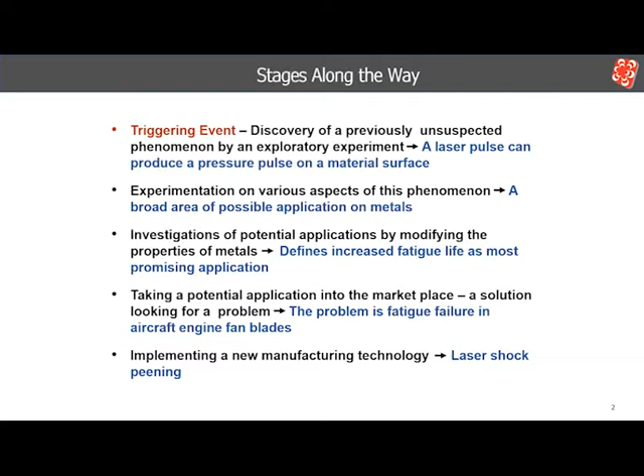We begin in the early 1960s. The triggering event occurred when two Russian scientists, Askaryan and Moroz, set out to measure the photon pressure of a pulsed laser beam on a target. What they measured was a pressure 10 to the 4th to 10 to the 5th higher than the estimated photon pressure. They suggested that what they actually measured was probably the recoil pressure from the material vaporized from the target surface by the laser beam.

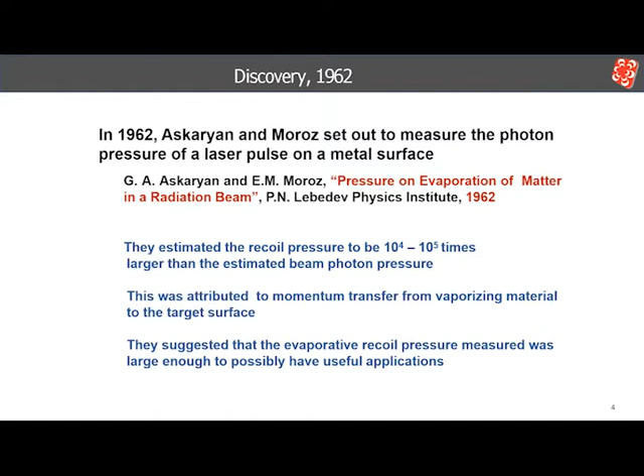They also suggested that this might have useful applications. This discovery prompted many other laboratories to investigate the material dependence, magnitude, and other characteristics of the vapor impulse associated with the laser pulse. It is interesting that many of these studies were carried out at government laboratories. The U.S. laboratories had quick access to the Russian technical journals, which were immediately translated by government-funded teams.

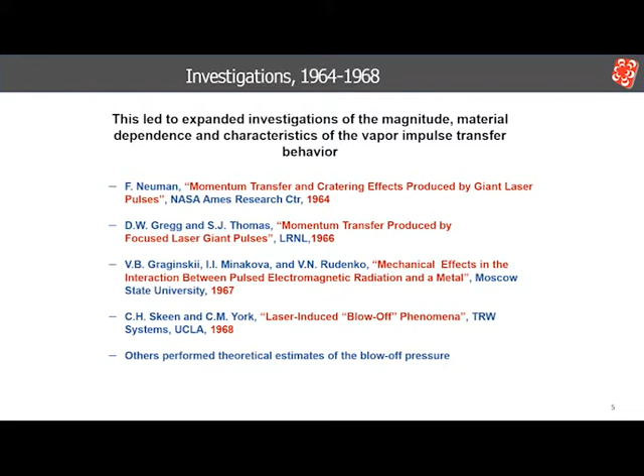The second key event occurred in 1968. Anderholm at Sandia Laboratories was also investigating some aspects of this vapor impulse, and like all the others, the target was in a vacuum because of the high laser pulse intensities used to increase the pressures and to simplify the measurement of the impulse. Anderholm made the connection that if the vapor was confined against the surface instead of blowing off, it would greatly enhance the shock wave pressure.

He vapor deposited an aluminum film on the surface of a 6 mm thick quartz disc and measured the pressure pulse with a quartz gauge. His demonstration of this concept produced a 3.4 gigapascal surface pressure with a beam power density of 1.9 gigawatts per centimeter squared. This simple demonstration for dramatically increasing the impact of a laser impulse on a surface would eventually enable the development of laser shock peening.

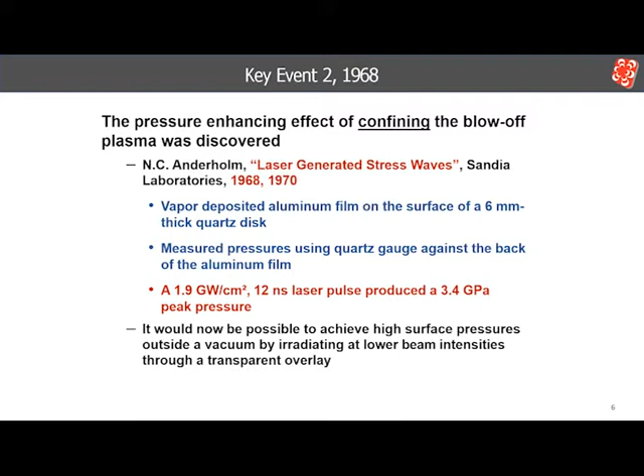In the same year Anderholm announced his discovery, Philip Malozzi convinced Battelle it should position itself to compete for programs developing laser fusion, a hot topic at the time. This would require a large laser, and Battelle acquired a laser from France.

The laser was a CGE VD640 neodymium glass laser configured to output up to 200 joules, with a pulse width of 20 to 30 nanoseconds or longer, and a Gaussian beam every 8 minutes. On the left is the control station, followed by the bank of capacitors for the flash lamps. On the right is the row of amplifier rods with the output at the far end.

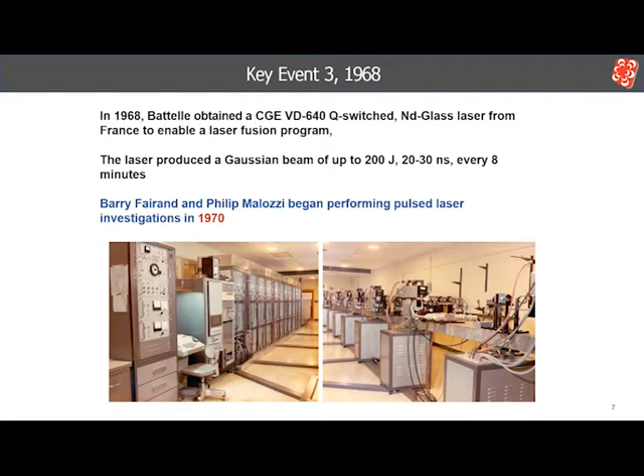For conducting the laser shock experiments, a small workstation was installed in line with the laser beam at the far end. With quartz overlays, the specimens were placed in line with the beam. With water overlays, in the first years, the specimens were submerged under a water layer and the beam was directed downward onto the specimen.

Next, I'll discuss events in the 1970s when much of the exploratory investigation of laser processing was conducted.

When it was realized that a significant shock wave could be produced in a metal surface by a laser pulse in air, it immediately generated interest in the effects it had on the target. These are the first investigations of the effect of a laser pulse-induced shock wave on the microstructure of a metal target. Mirkin shocked the steel target and observed deformation twinning in the ferrite grains extending more than half a millimeter deep below the shocked area.

This observation was followed by that of Metz and Schmidt, who laser shocked nickel and vanadium foils and then annealed them. After annealing, they used transmission electron microscopy to look at the microstructure in the foils. They observed small dislocation loops only in the shocked area. These could only have developed during annealing by the coalescence of vacancies produced by the plastic strain driven by the shock wave.

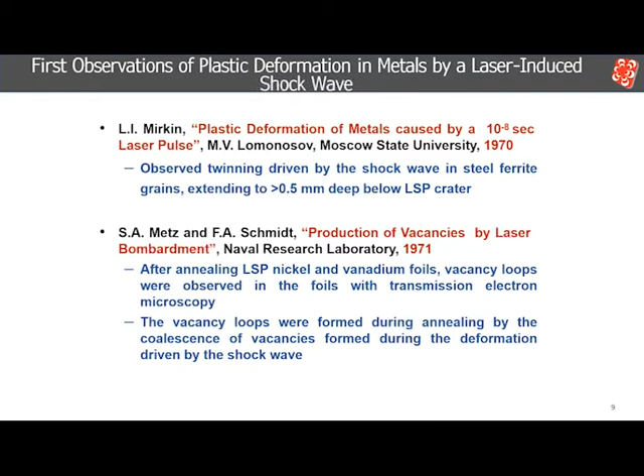The fourth key event occurred in 1972. After the Battelle laser became operational in 1970, in 1972, Battelle was still waiting for funding for the fusion program, and the laser physicists having the responsibility for the laser were looking for other uses for it until funding appeared.

In mid-1972, Barry Fairand approached Ben Wilcox in the Metal Science Group of Battelle as to whether there might be some tangible benefit to using laser-induced shock waves on metals. Wilcox suggested a simple experiment of laser shocking several thin aluminum alloy tensile specimens having different strength properties due to different heat treatments, and determining whether there was a resulting change in strength and ductility.

This experiment resulted in the first publication of laser peening.

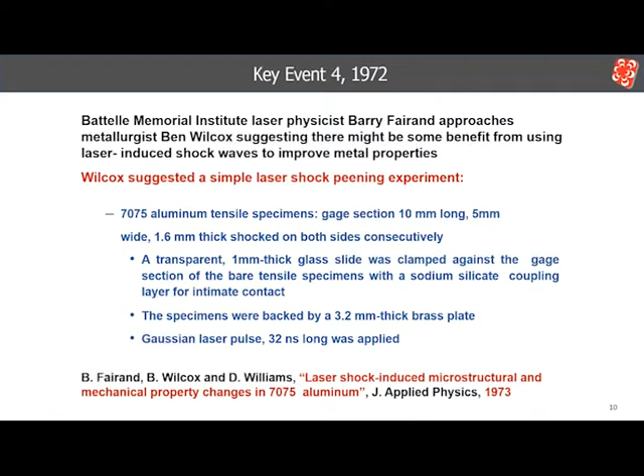The tensile specimens were 7075 aluminum, 1.6 millimeters thick. They were shocked with one shot on each side with a 32 nanosecond pulse through a glass overlay and backed by a 3.2 millimeter thick brass plate. The specimens were given several different heat treatments.

The solution treated and quenched condition has the lowest strength because there is no precipitation hardening. After laser shocking, there is some work hardening and loss of ductility. The stronger overage condition showed a significant increase in the yield and ultimate strength with a small loss of ductility. The increase in strength occurs because the precipitates generate a significant increase in the dislocation density when laser shocked.

The strongest peak aged condition has a very fine dispersion of small precipitates between a coarser dispersion of large precipitates. This imparts a big increase in precipitate strengthening, which is higher than the strain hardening effect. Thus, the shock wave actually causes a slight loss in strength because the dislocations driven by the shock wave had cut paths through the small precipitates.

This small experiment showed that a laser shock wave could significantly change the mechanical properties of a metal. Based on this result, Wilcox and Fairand submitted a proposal to the National Science Foundation to pursue exploring the effects of laser-induced shock waves on metals.

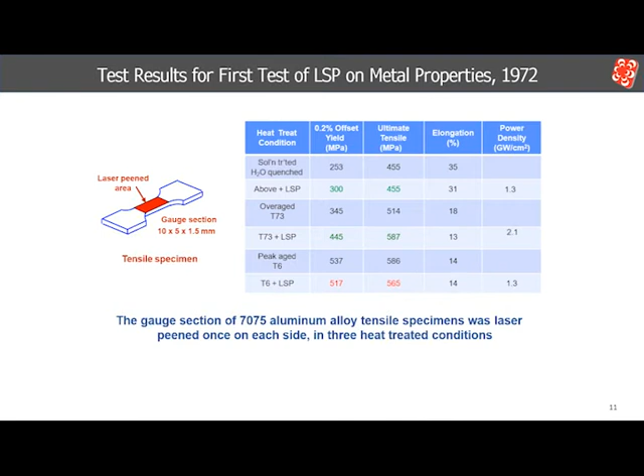Thus, fewer dislocations are formed, and the strength is actually decreased by the shock wave because it leaves behind some mobile dislocations and glide paths for movement during the subsequent tensile test.

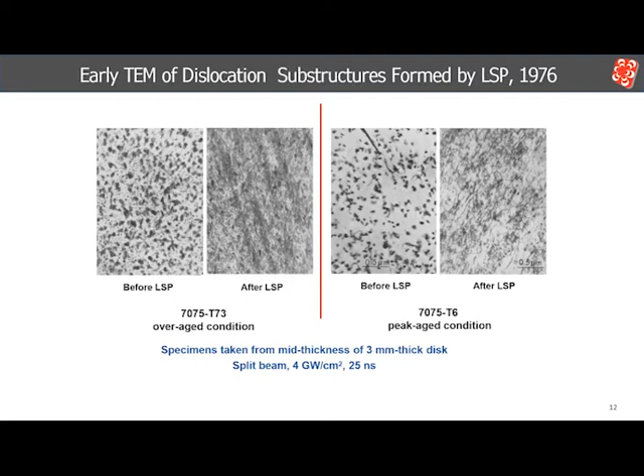In 1974, the first patent for laser shock processing was granted to Mallozzi and Fairand. Note the broad range of pulse length and energy density covered at this time when so little was known about the process. The different characteristics of potential overlays and types of overlays is well covered. Note at that time they were also considering the possibility of using an explosive coating to increase the pressure.

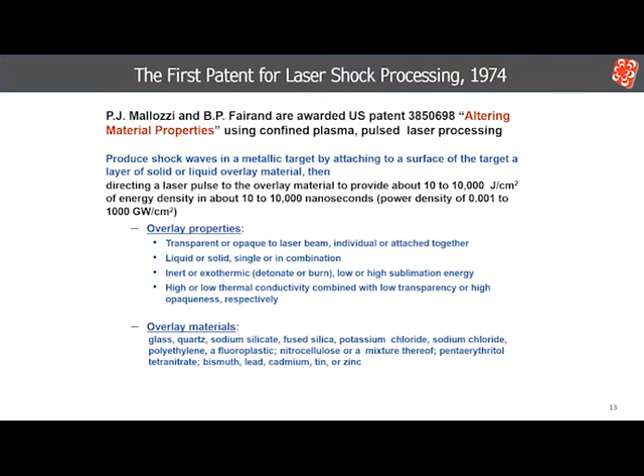In the same time period of the early 70s, others were investigating the effects of laser-induced shock waves. O'Keefe and Skeen were testing how to increase the shockwave pressure with different transparent overlays and looking at shockwave interactions with thin, unsupported metal targets, among other things.

Fox brought his specimens to Battelle for processing. He came up with the idea to use water and black paint, which turned out to be a very useful combination.

Yang measured the pressures developed on a broad range of thin metal coatings deposited on glass overlays at low power densities, and found little difference in the pressure between the different metals or film thicknesses.

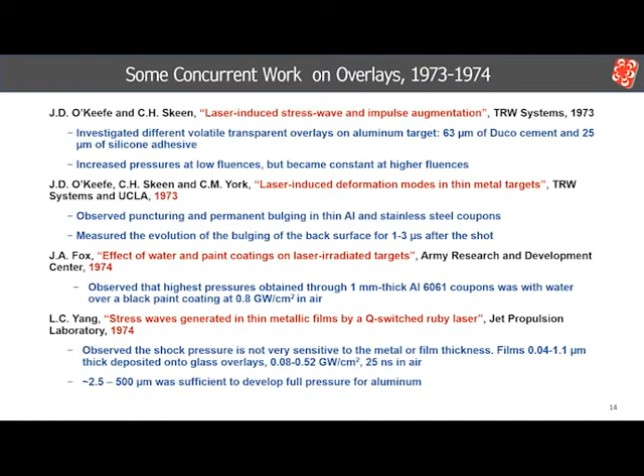In January of 1973, I returned to Battelle after spending a year at the Danish Atomic Energy Laboratory in Risø. At that same time, the National Science Foundation approved the funding for the laser shocking proposal. I was asked to take on the project jointly with Barry Fairand, and it turned out that he and I worked very well together. This program began six years of support by Robert Reynick, our National Science Foundation program manager.

The materials effort began with a look at the distribution and intensity of the plastic strain produced by a laser shock wave. Iron 3 silicon alloy was an ideal material to do this, providing direct visual evidence of plastic strain.

The physics effort began with an investigation of the pressure dependence on power density using various overlays and of the decay of the shock wave. In addition, computation of the shock waves was begun.

Most of the modeling used a 1D radiation hydrodynamic code named LILA. It was originally developed by Sandia National Laboratory in 1966 and was updated by Sandia and the Air Force in 1976. Later, laser shock strengthening of weld zones in aluminum alloys and split beam shocking were explored.

Near the end of the program, a 2D wave propagation code named TØØDY was used to determine whether the plastic strain distribution after laser shocking could be predicted.

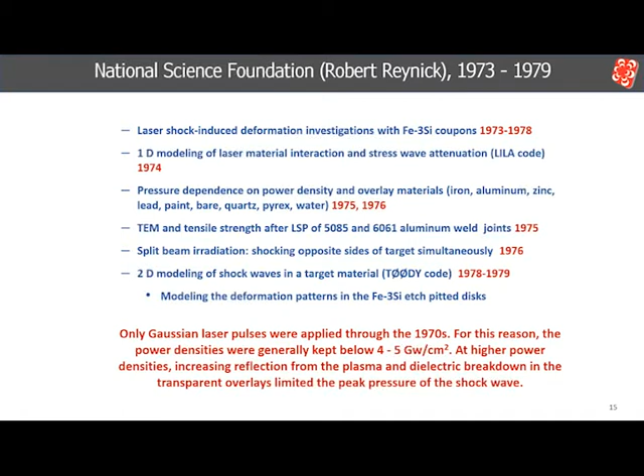Here we are going to look at the deformation patterns produced by laser shocking iron silicon discs. The plastic strain distribution can be seen by applying an etch pitting technique to the surface of the laser shocked cross sections of the alloy.

The top figure is a disc shocked with the lead plus quartz overlay. The lead overlay was initially selected and used in these initial experiments because of its low vaporization energy, enabling more of the beam's energy to expand the vapor and increase the pressure. Lead worked very well for power densities between 0.5 and 1 gigawatt per centimeter squared, but its effect diminished at higher power densities. After this study, it was no longer used.

Here the laser spot covered the entire surface of the discs. The deformation pattern in the upper figure shows there was significant interaction between the waves reflecting from the flat surfaces and those reflected from the circumference of the disc.

The lower figure was shocked with only a quartz overlay. The etch pit distribution is similar, but much lighter than with the lead overlay. Even though the power density is almost twice that of the top figure, it is obvious that the peak pressure was lower than with the lead overlay in the above figure.

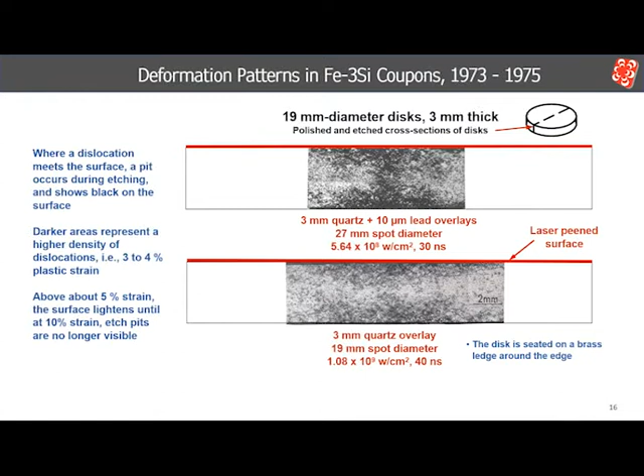Here a series of discs with decreasing thickness were all shocked with nominally the same conditions using a quartz overlay. They were shocked with a 2.5 centimeter diameter spot covering the entire surface of the discs. Although they were shocked from one side only, the back free surface shows about the same amount of strain as the front surface. There's a quartz gauge at the back surface of the two thicker discs, but not on the two thinner discs. The thinnest disc shows about 2 to 3% strain through the thickness.

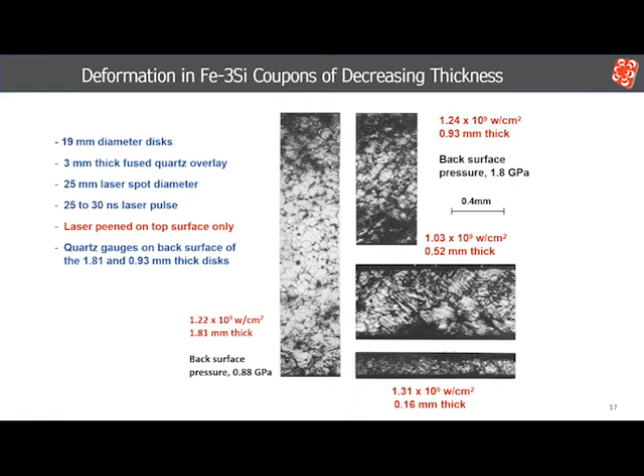These are the first measurements of the decay of a laser-induced shock wave. The measurements were made on the discs of decreasing thickness shown on the previous slide. The back surface pressure measurement was made on an iron film deposited on a quartz disc.

LILA was used for the decay computation. It's a hydrodynamic code and shows good agreement near the surface where most of the decay is hydrodynamic. However, deeper into the disc, where plastic work predominates, adding to the rate of decay, the measured pressure decreases more rapidly.

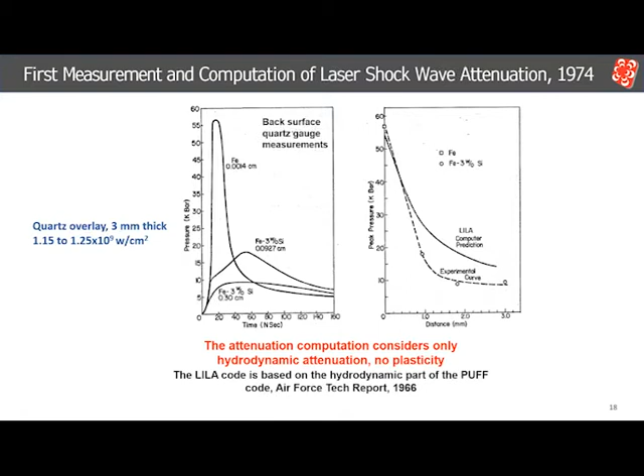In the left figure, we are comparing the laser pulse and the resulting pressure pulse for a water overlay on an aluminum film. The rise times are identical. The pressure pulse is about a factor of 2 longer than the laser pulse here, a little shorter than is usually observed, possibly because the power density is relatively low.

The spike on the back side of the pressure pulse was perhaps the thermal front entering the quartz gauge. On the right, we see the results of using the LILA code to compute this pressure profile from a triangular pulse simulating the actual one shown in the left figure.

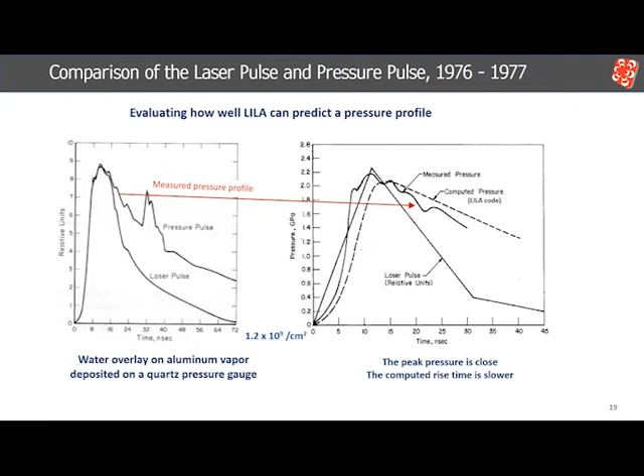The time scale on the right is about twice that on the left, so the actual pressure pulse on the right appears broader, but is recognizable by the ripples in the profile. The computed peak pressure is reasonably close, and the curvature at the bottom of the leading edge is also shown, but the rise time is slower.

To compare the overlays being considered at the time, computations were made to gain a better understanding of how they affected the magnitude and duration of the pressure pulse.

The figure on the left compares a computed profile for a zinc overlay with the measured profile. The rise time and peak pressure are in good agreement. However, the back of the measured pressure pulse decreases more rapidly than the computed one.

In the figure on the right, the computed pressure profiles of iron and lead overlays were modeled with a lower power density. We saw earlier that lead outperformed iron in the etch pitting experiments at a low power density.

For an input triangular pulse, like that shown in the previous slide, the two metals show quite different pressure profiles. The rise in pressure on iron occurs much further into the laser pulse than it does on lead. This can be attributed to iron requiring much more of the laser pulse's energy at the front end to generate enough vapor to increase the pressure.

This results in a much shorter pressure pulse on iron than lead, even though the peak pressure is about the same. Unfortunately, these computations were expensive and time-consuming back then, or more of these comparisons would have been pursued.

Holes were punched in a card for every line of code. Then drawers full of punched cards were carried to and fed into the big IBM computer. Often these computations took hours and had to be deferred to weekends.

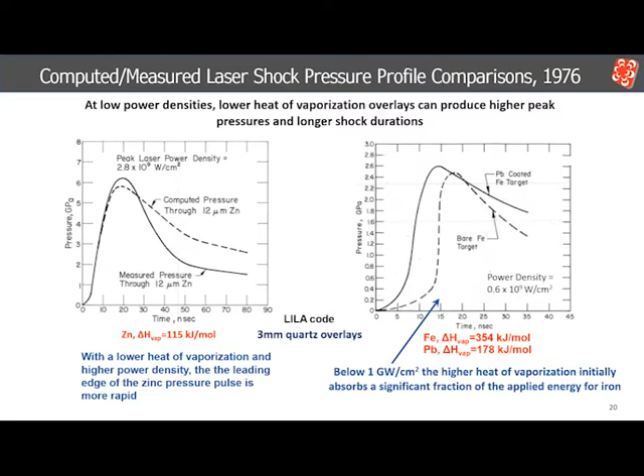We also took a look at comparing the effects of short laser pulses to much longer laser pulses. On the left, we show a comparison between measured short and long laser pulses and the resulting pressure pulses for a zinc and 3mm quartz overlay.

Because of the longer rise time in the long pulse, the pressure peak occurs much later than in the short pulse. The 185 nanosecond pulse maintains a sustained pressure of about half the peak pressure for over 400 nanoseconds.

On the right, we show short and long pressure pulses measured at the back surface of 3mm thick iron silicon discs with a quartz overlay. Here the pressure scale is in kilobars, so 10 kilobars is 1 GPa. The long pulse has sustained a much higher pressure out to at least 500 nanoseconds.

The cross-section of the iron 3 silicon disc shocked with a 200 nanosecond pulse shows 3 areas of shockwave interaction deformation. These were not seen after short pulses, except when the laser spot covered the entire top surface of the disc, enabling the circumferential reflected waves to immediately interact with the axial shock wave.

With the long pulse and a spot size less than half the diameter of the disc, the axial pressure was still sustained long enough that the interaction with the delayed circumferential waves, which also have a higher sustained pressure, was sufficient to cause plastic deformation.

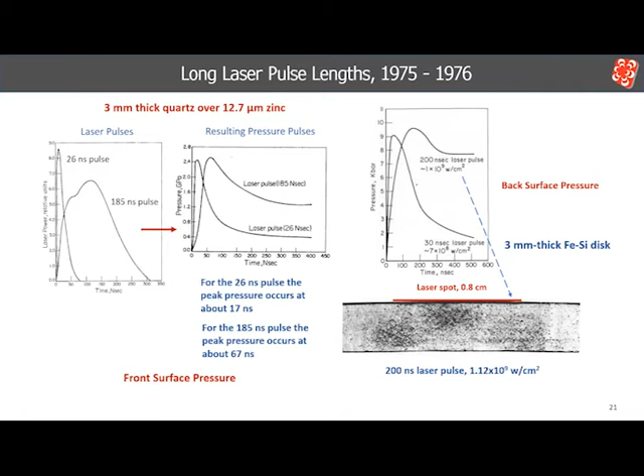In 1975, funding was received from NASA Langley to focus on the effect of laser shocking on 2024 and 7075 aluminum alloys. This included looking at effects on mechanical properties, corrosion, stress corrosion cracking, and black paint overlays.

Laser shock 2024 T351 showed increased pitting and corrosion resistance, but 7075 T651 showed little change. Both alloys displayed increased resistance to stress corrosion cracking after laser shocking, with 7075 T651 showing the greatest response.

There was also an evaluation of whether the TEA CO2 laser could produce strong shock waves. It could not.

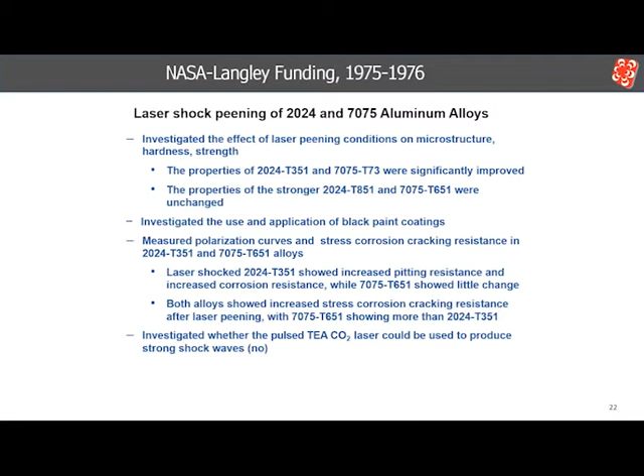One of the cases looked at in this program was the use of the split beam to get more uniform work hardening into flat tensile specimens. The meeting of the shock waves should increase the work hardening at mid-thickness. As expected, the work hardening was increased at mid-thickness, as shown here, and increased the average hardness through the thickness, but of course was less effective as the thickness increased.

In the thinner sheet, it is clear that the average hardness through the thickness was higher than through the thicker sheet, even with the lower power density applied.

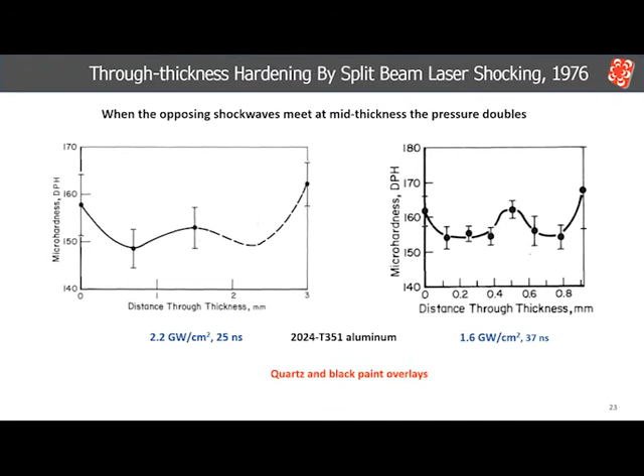In looking at work hardening of alloys by laser peening, most attention was given to 2024 aluminum. The surface hardness was measured with increasing power density to determine the pressure at which work hardening occurred. Black paint and quartz overlays were used for most of the shots. Two heat-treated conditions were investigated.

In the left figure, hardening of the 2024 T351 begins to occur at a very low peak pressure and steadily increases up to what appears to be a maximum at about 165 DPH, or diamond pyramid hardness.

For comparison, Herring and Olson performed flyer plate impacts on similarly aged 2024, whose hardness was very close to ours. Their flyer was a thin mylar plate producing a shock wave 150 nanoseconds long and square in shape. Their results are also plotted in the figure and slightly raise the apparent laser shock hardness plateau. For comparison, if you beat on the surface with a hammer, DPH 180 is the maximum hardness of these alloys.

In the right figure are the results for the stronger aged 2024 T851 heat treatment. The hardness scales of both figures are aligned here. This condition showed no work hardening from laser shocking up to a peak pressure of 5 GPa.

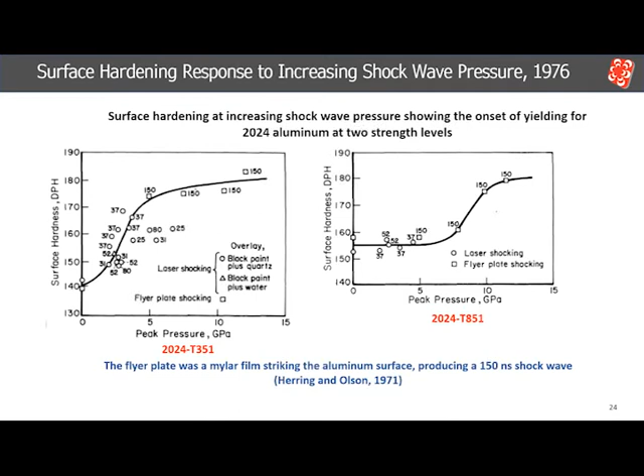Laser shocking was unable to overcome the resistance to deformation contributed by precipitation hardening from the thin, semi-coherent, lath-like S' precipitates below 7 GPa.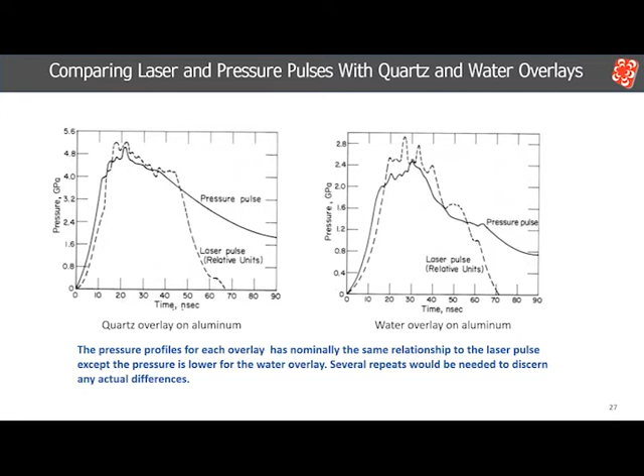If we compare the pressure profiles, the rate of pressure increase for aluminum lags significantly behind that for zinc. There are two contributing factors. First, the surface temperature is lower for aluminum, which can be attributed to the loss of heat or energy from the vapor through the aluminum surface.

Second, the delay in the pressure rise at the beginning of the pressure pulse for aluminum can be attributed to its higher heat of vaporization, consuming a significant amount of the beam energy early in the laser pulse. Because of these factors, zinc produces a higher and longer pressure pulse.

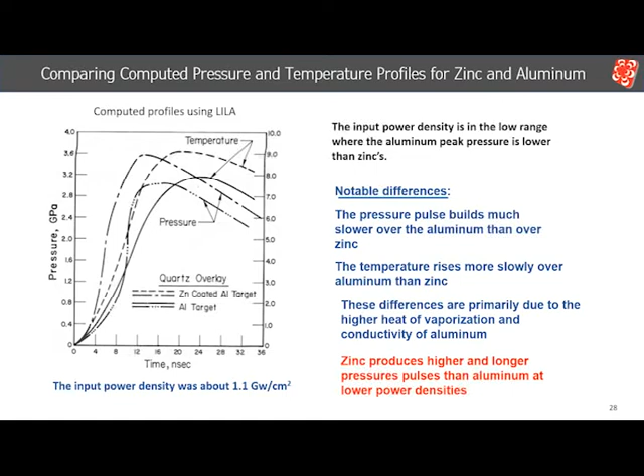In the same time period, we had a small program from the Army Research Office to determine whether pressure-induced phase changes could occur during laser shocking of some alloys. We chose the alpha phase to omega phase and the beta to omega phase transformations in titanium-vanadium alloys to investigate this possibility. These transitions were observed by others at static pressures above 9 gigapascals.

To have any chance of succeeding with a shock wave, we had to increase the shock pressure above 9 gigapascals, and looked at two ways to accomplish this. First, we computed what level of peak pressure we could expect from each approach.

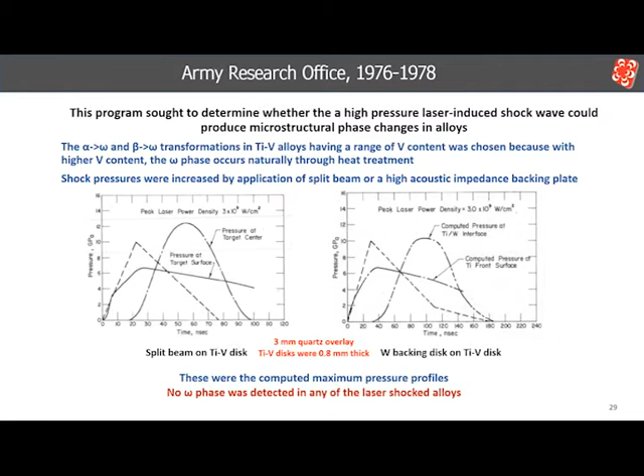However, although numerous variations were investigated experimentally, no evidence of the omega phase produced by laser shocking was found. One reason may have been that the pulses were too short to complete the transformation.

In 1977, when it was becoming evident that laser shocking could be potentially useful to industry, Battelle funded an effort to expand the exploration of applying laser shocking to other materials and properties. We first examined the effect of laser shocking on fretting fatigue and fatigue of welds, with long life increases for both. The effect of laser peening on galling and wear resistance in stainless steel showed positive results.

Ceramics were also investigated. Shocking silicon nitride gave interesting results with some increases in hardness and plasticity. We also had the idea to take advantage of the volume increasing tetragonal to monoclinic phase change in tension in yttria stabilized zirconia, to use the tensile shock wave reflecting from the back surface to drive transformation to the higher volume phase. This would then create a compressive residual stress in the back surface and add additional toughening to this ceramic.

It didn't work. Battelle also funded an extensive investigation of fatigue of 2024 T3 aluminum and the effects of variations such as the use of annular spots around holes, transparent acrylic overlays, use of momentum traps, split beam applications, and residual stress formation over a wide range of power density. We also looked at laser shocking steel in this program.

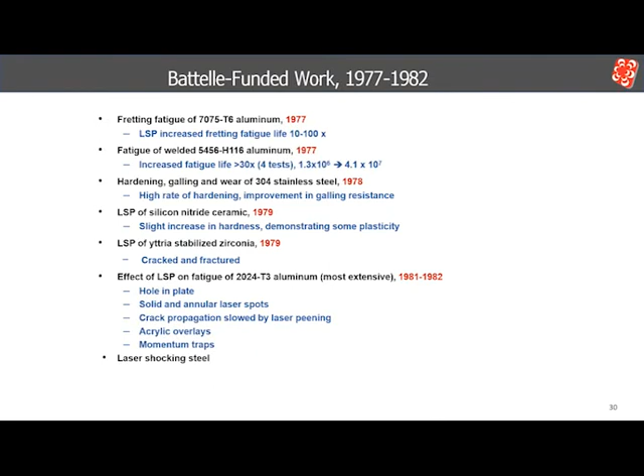In 1977, we were beginning to look at other mechanical properties beyond strength, hardening, and corrosion. Steve Ford suggested we examine how laser shocking might affect fretting fatigue in riveted joints in aircraft structures.

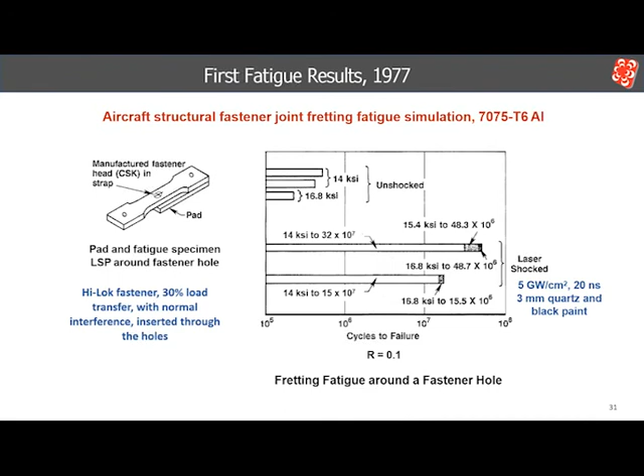The lower disc has a guard ring press-fitted onto it, intended to produce a much different stress wave interaction. With the guard ring, the tensile waves reflected from the outer rim of the disc cannot pass back through the interface into the central disc.

TOODY now predicts a column of more intense deformation along the axis, as well as deformation associated with the internal interface of the guard ring. However, the most intense strain along the axis is at the top of the disc, not the bottom. The strain distribution at the guard ring interface is pretty much as predicted.

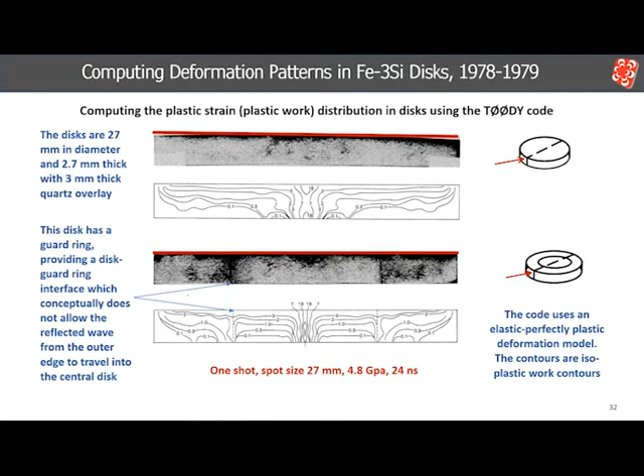After obtaining good fatigue results in fretting fatigue and aluminum alloy welds, we were funded by the Air Force to investigate laser peening around simulated fastener holes in 2024 and 7075 aluminum. The objective was to inhibit fatigue crack initiation and propagation from the holes themselves, not fretting damage. We were also to present preliminary design concepts and costs for a production laser in case of compelling results.

In this program, we obtained the first residual stress measurements on laser-shocked surfaces, confirming the compressive residual stresses produced by laser peening. The fatigue results showed some improvement due to laser peening, but not enough to pursue it further. Unfortunately, we were still applying lower power densities to avoid the dielectric breakdown and reflection problems encountered at higher power densities.

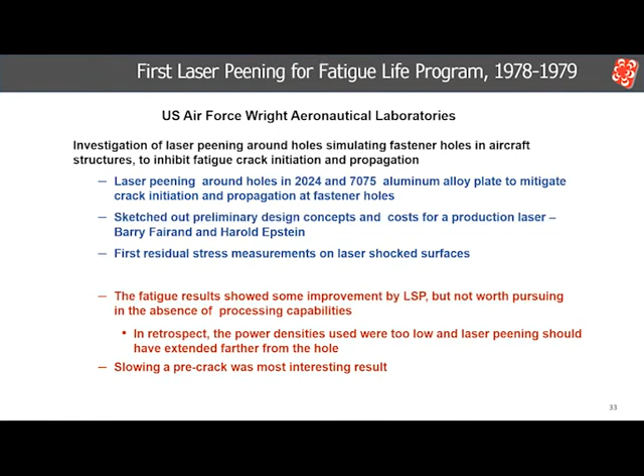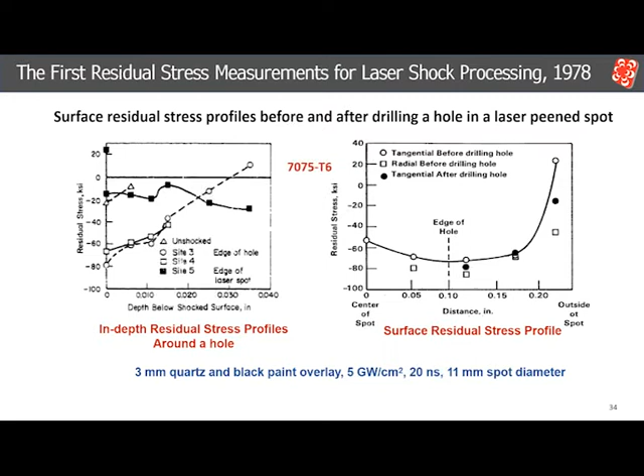Before testing, the crack lengths were nominally about 5.7 millimeters long, including the hole and notches. In the initial unshocked condition, the fatigue life was 1.2 to 1.4 times 10 to the 5th cycles. In the first laser peen set without pre-cracking, the fatigue life was nominally increased 6 times. In the second set, laser peening after pre-cracking, the fatigue life was increased about the same amount.

Although the test started with a crack present, the laser peening extended farther out in front of the crack, contributing to this increase in fatigue life.

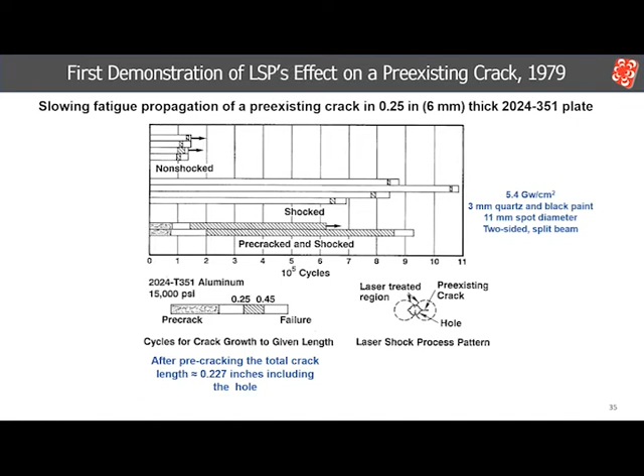We began looking at laser peening steel in 1980. First investigated was the hardness dependence of the residual compressive stress. In 1.5 millimeter thick steel sheet, the residual compressive stress produced in the hardest condition, Rockwell C54, was much higher than that produced in the softer condition, Rockwell C42.

The surface compressive stress in RC54 steel was about the same for 1 shot and 5 shots, but in depth 5 shots produced higher stress. Because of the thinness of the sheet, more shots could not increase the depth. The zero crossing was the same for both 1 and 5 shots.

It was about this time that we realized that if the front end of the Gaussian pulse was cut off to create a fast rise time in front of the laser pulse, we could reach higher peak pressures by increasing the power density. By sharpening the leading edge of the laser pulse, most of the beam energy would be quickly absorbed by the expanding vapor before the plasma progressed to reflecting too much of the beam and dielectric breakdown of the transparent overlays progressed too far. Subsequently, power densities above 5 gigawatts per centimeter squared are now routinely used.

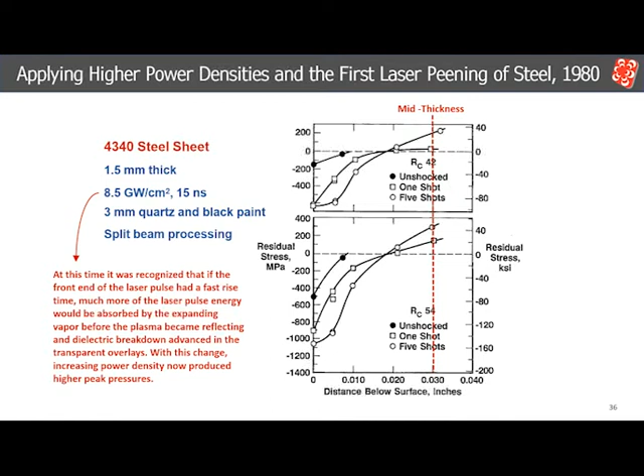The fatigue properties were examined in two configurations, steel sheet and steel bar. In laser peening thin sections, where fatigue cracks generally occur at an edge, the laser peening would be applied along the edge where a crack could occur.

This resembles laser peening a fillet, where the main effect is to retard crack initiation. As a crack moves into a laser peened surface on a thick section, the retardation effect decreases with depth as the compressive stress decreases. The steel was tested at a hardness of 54 Rockwell C.

Laser peening produced a tremendous 80% increase in fatigue strength.

Laser peening the surface of the notch in the bar using black paint and water overlays, the specimens were given 1, 3, or 5 shots. With 5 shots, the fatigue strength was increased at least 30%.

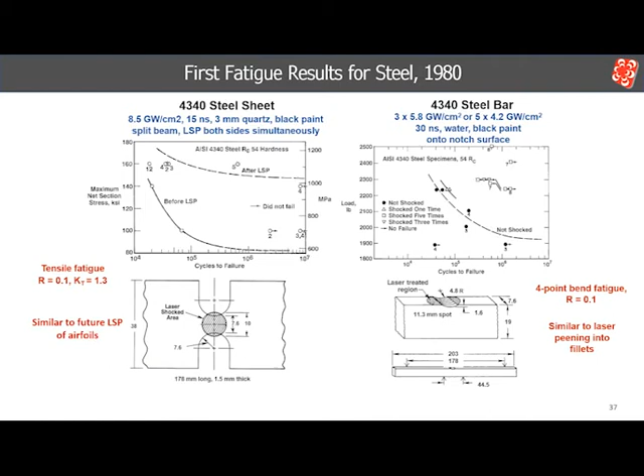When the laser peen surface surrounded the hole, a crack would form on the hole surface at mid-thickness, tunnel under the surface, and not appear on the surface until it was almost at the edge of the laser peen spot.

By laser peening an annular ring some distance from the edge of the hole, the crack was immediately visible, but it was slowed when it hit the compressive stress under the laser peened ring. This still provided a factor of 2 to 3 increase in the fatigue life.

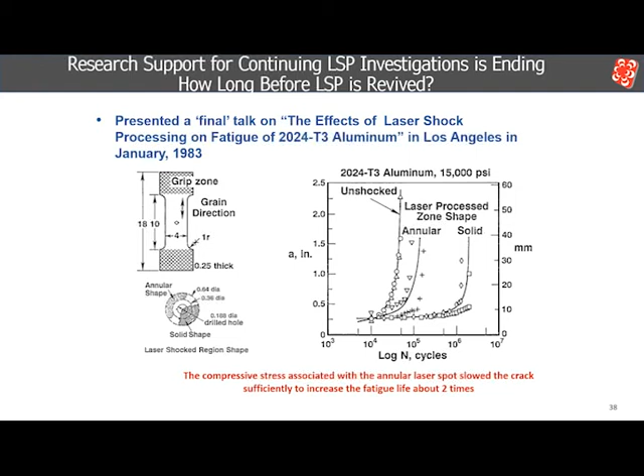By the early 1980s, it was getting more difficult to get funding for laser shock investigations. It was no longer a novelty, and the broad outline of the effect of laser shocking on metals had been sketched out. The research funding sources felt that it was no longer an appropriate use for basic research funding. It was time to identify potential users of the technology and sell them on funding the work necessary to have a technology they could use.

Key Event 5 was initiated within a week or two after the Los Angeles conference, when I received a call from the foundry manager of a cast iron foundry in Decatur, Illinois. He had attended the talk in Los Angeles. The foundry was Wagner Castings, making castings for the auto industry.

He visited Battelle, saying there had been recently a management buyout of the foundry from the Wagner family, and the management was now looking for ways to broaden their market. When he had reported on the Los Angeles meeting to management, he described laser shocking as something they should consider.

The idea was that if they could improve the fatigue properties of laser peened cast iron to match that of steel, they might be able to undercut the price of steel parts and capture a share of the market.

When I visited Wagner Castings the next week, they agreed to fund laser peening of cast iron test specimens and test them. If successful, they would negotiate a laser peening license from Battelle and support development of laser peening at Battelle for their use.

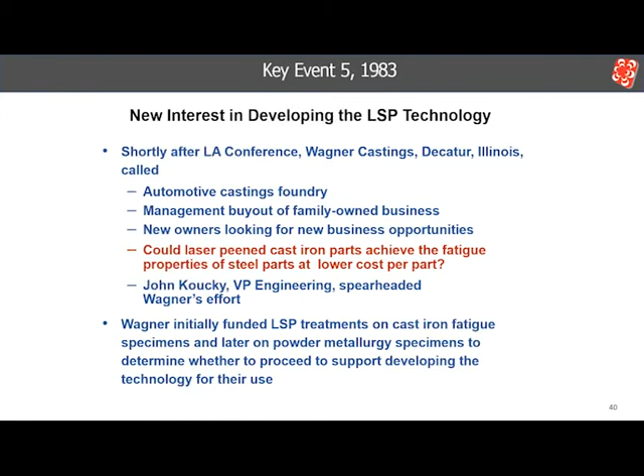After these tests, Wagner negotiated a licensing agreement with Battelle and commenced to fund the development of laser peening.

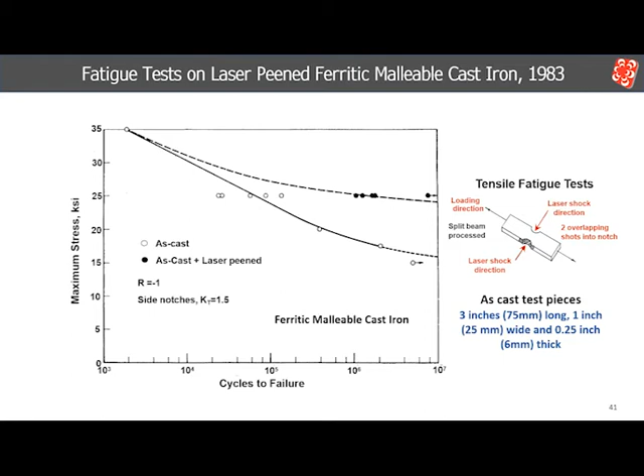Not long after this, Wagner thought another way to broaden their market would be to remake themselves into a near-net or net-shaped part provider by acquiring a company that produced powdered metal parts. They would then laser peen them and expand their market. To assess whether laser peening could significantly improve the fatigue strength of powdered metal parts, Wagner supplied notched powder metal tensile fatigue specimens identical to the cast iron specimens.

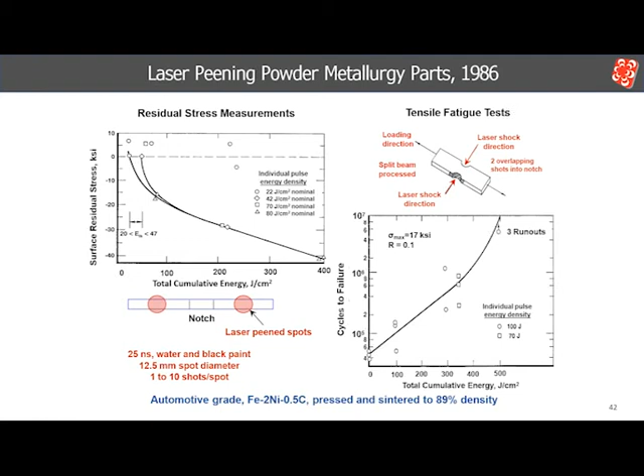In 1986, Dr. Remy Fabbro and Jean Fournier from the École Polytechnique in Paris visited Battelle to discuss laser shock processing. After returning to France, Dr. Fabbro's group initiated an era of extensive work on many important aspects of laser shock processing in France in the following decades. This work was of great benefit not only to our activities, but also to providing information and encouragement to other groups interested in pursuing the technology. All these combined efforts have contributed to the increasing acceptance and use of this technology over the last 30 years.

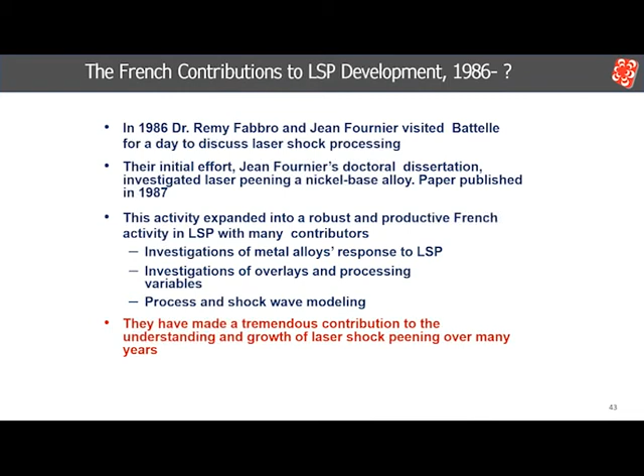For Wagner to demonstrate the commercial feasibility of laser peening, they would need a laser with a small footprint and a pulse rate much greater than 1 every 8 minutes. By 1986, Wagner made the decision to fund the design and construction of a small footprint laser providing 2 beams of 50 joules each, 20 nanoseconds, with a 1 Hz pulse rate. The laser was designed by Harold Epstein and built at Battelle.

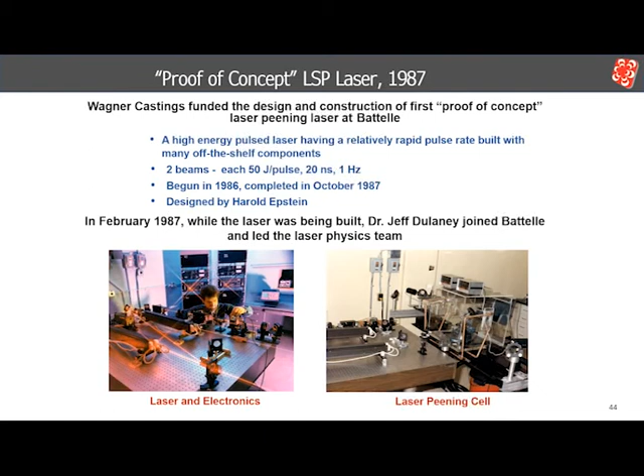The next step was to take the technology into the marketplace, a solution looking for a problem.

In the late 1980s, after building the prototype laser was underway, Wagner and Battelle began to market the technology. Wagner's plan was to provide laser peening services as well as using it in their foundry. Laser peening was largely unknown in the industry. John Koucky, Wagner's chief engineer and LSP program manager, assisted by me from Battelle, undertook to introduce industry to the new technology and develop interest.

From the many presentations and phone calls made to companies who could have a perceived need for laser peening, numerous test parts were given to us to laser peen and returned to the companies for testing. In most cases, there was significant improvement in fatigue life. However, we weren't equipped to immediately offer services. There was no laser peening facility. It was difficult to convince a company that great test results on their product justified a future commitment to install or send their products to a non-existent facility.

However, we were accumulating valuable laser processing experience and data that would be useful in that transition later. I was told that it was much easier to introduce a new alloy or material to industry than a new manufacturing process. A new process had to fit into an existing manufacturing system with minimal interruption of the flow of product. However, if there is a crisis with a product and a new technology was a solution to the problem, there was a huge incentive to get the new technology into the product, despite the cost and inconvenience of doing so.

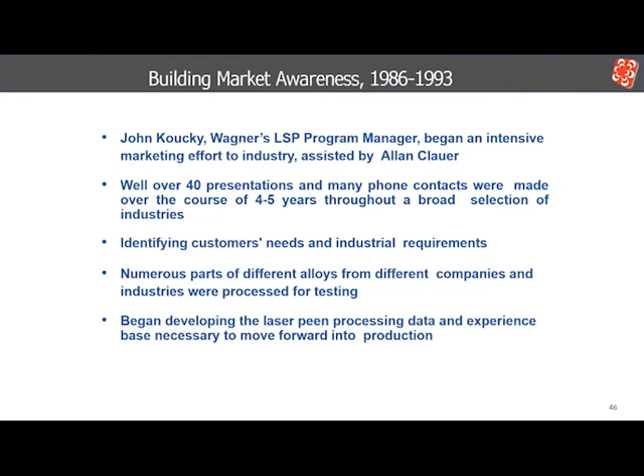The situation was about to change.

The sixth key event occurred at a presentation made by Koucky and myself to the Air Force at Wright-Patterson Air Force Base in Dayton, Ohio in 1990. After the presentation, William Cowey asked whether we had talked to General Electric aircraft engines in Cincinnati. We said we hadn't been able to set up a meeting. He took us to his office, got on the phone, and set up a meeting with them for us later in the week. At the meeting, after an abbreviated presentation on laser peening and much discussion, GEAE gave us their small standardized test piece to laser peen and returned for evaluation.

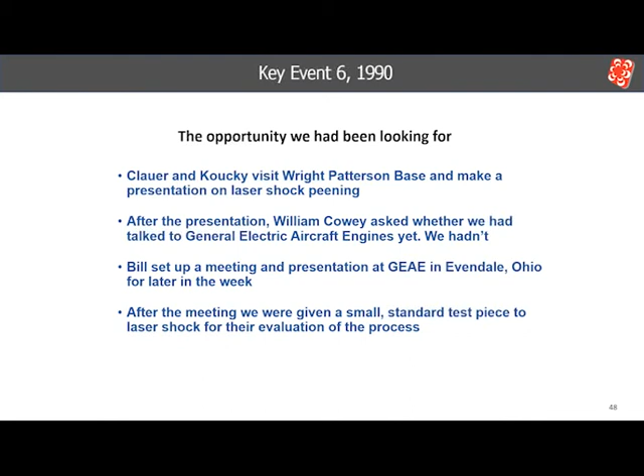The problem was that the F-101 engines on the B-1 bombers were susceptible to foreign object damage on the leading edge of the first stage fan blades. Damaged blades could fail in flight and destroy the engine. It was possible that the engines were sucking in fine particles from the runways on takeoffs and landings, since most of the damage were small nicks a few tenths of a millimeter deep. These small nicks could not be tolerated.

During inspections, they were detected by dragging a thread or thumbnail along the leading edge. If a nick was detected, the blade had to be replaced. Though small, they imposed a huge operational cost for damage detection and blade replacement, as well as grounding the planes waiting to be repaired.

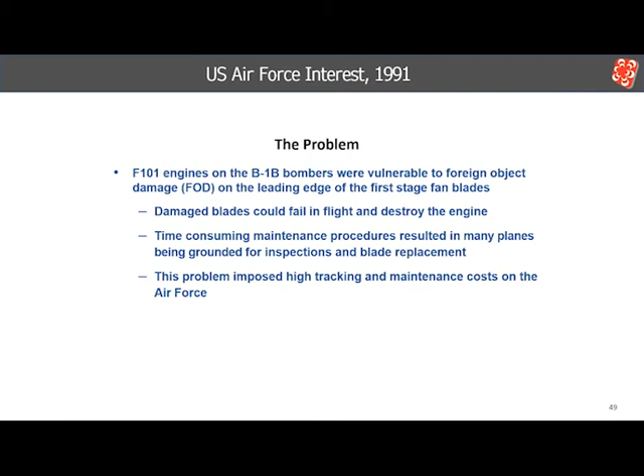After evaluating the laser peen test piece, GEAE sent 4 first-stage fan blades for laser peening. They were to be laser peened along the leading edge up from the platform. When the 4 laser peen blades were returned to GEAE for testing, they damaged them many times more severely than a nick. They used a hacksaw to make a 6 millimeter deep notch in the leading edge.

After testing them, the results were almost unbelievable. They tested like new blades. There was no need to pursue optimization of the processing parameters. With this result, further testing and planning for implementing the process on the blades began.

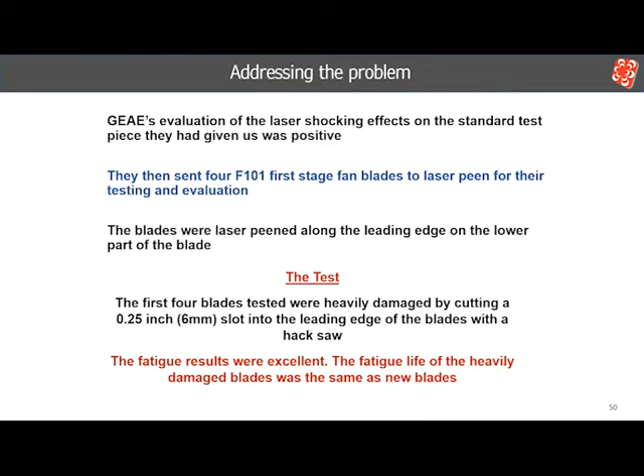Years later, the Air Force did their own evaluation of the process. These are their results. The Air Force compared damaged blades given different surface treatments and 2 different types of damage to a new blade. The surface treatment conditions were dual shot peening applied to new blades at that time, high intensity shot peening, and laser peening.

The 2 types of damage were a sharp chisel pushed 6 millimeters into the leading edge and a 3 millimeter deep cut by electrical discharge machining. The chisel damage had heavy plastic deformation at the notch tip, while the EDM notch had none, but instead had a thin re-solidified layer, probably containing small shrinkage cracks with some tensile residual stress.

The blades were tested on a siren testing device at a very high frequency after being held 24 hours at 400 degrees Fahrenheit. The testing began at a stress amplitude of 20 ksi, then stepping up the stress by 10 ksi increments at 1 million cycle intervals until failure.

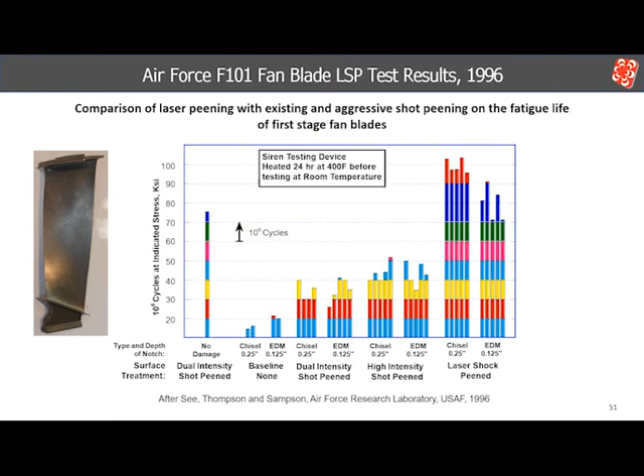The early 1990s were a time of transitions. In 1987, Wagner Castings decided to become part of a holding company, Sudbury Incorporated. Soon after that, Sudbury began to run into financial problems, leading to bankruptcy in 1993. At that point, Wagner was told by Sudbury to return the laser peening license to Battelle and cease supporting any further development. The impact extended farther than Battelle, however.

GEAE had an agreement with the Air Force to begin laser peening of in-service F-101 blades in 1997. Wagner was to build a laser peening facility and be prepared to process the blades at that time. With Wagner out of the picture, GE had to change plans.

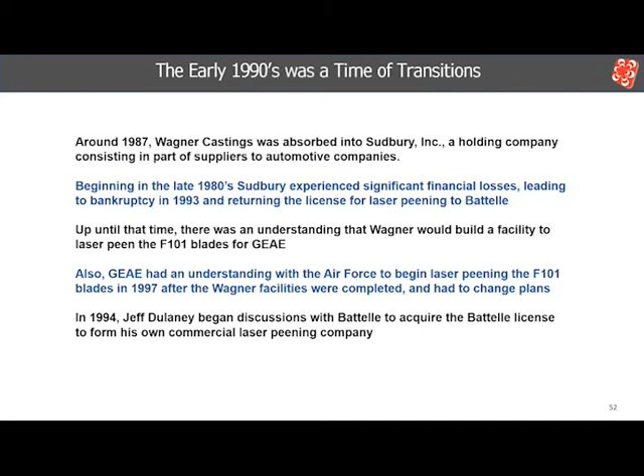In early 1994, Jeff Dulaney began negotiating with Battelle to acquire a license and start his own company. Jeff Dulaney founded LSP Technologies in February 1995, operating out of quarters in the basement of Battelle, and received a license for laser peening from Battelle in the summer of 1995.

At the same time, GEAE also negotiated a license with Battelle and asked Dulaney to help them evaluate the laser manufacturing company's capabilities to build production lasers in the short time available. They decided that none of them could. Failing to find a suitable commercially available laser, Dulaney offered to design and build the lasers for GEAE under their supervision in the summer of 1995. Todd Rockstroh led the GEAE team.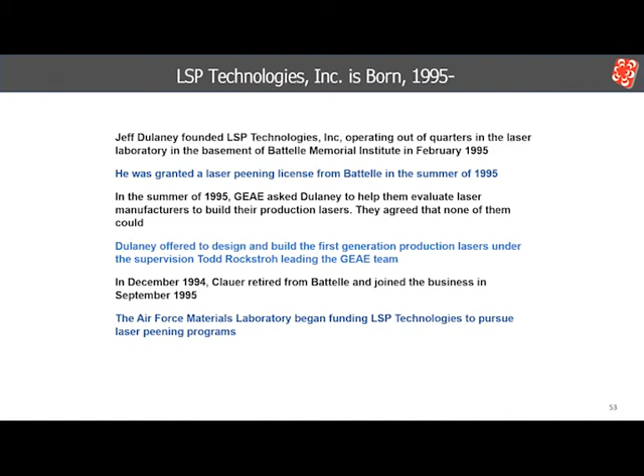I retired from Battelle in December of 1994 and joined LSP Technologies in September 1995. Chris Lykins of the Air Force Materials Laboratory provided significant funding to continue to pursue laser peening programs at LSP Technologies.

LSP Technologies delivered a small laser to GEAE in 1996 to begin low-volume production. When the first production laser was delivered in 1997, they went into full production. Two additional lasers were delivered later.

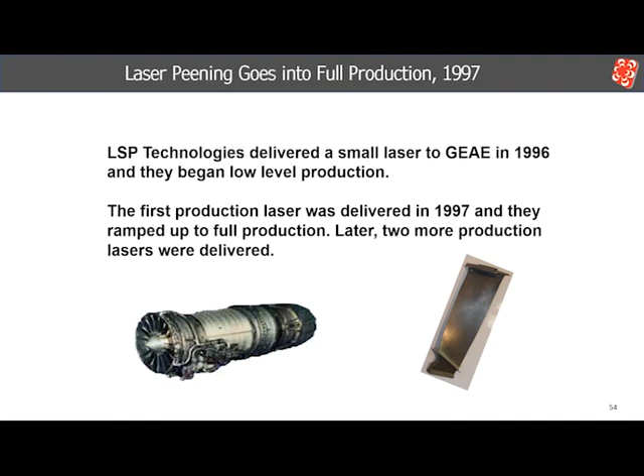Finally, 25 years after Wilcox and Fairand performed the first experiment of a laser-induced shock wave increasing the strength of 7075 aluminum, laser peening achieved the status of a commercial production process, providing a huge advance in the operational safety and maintenance cost of an aircraft.

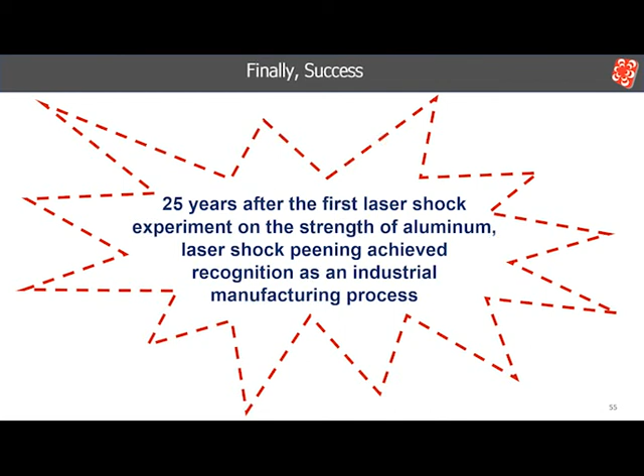With that benchmark achieved, Air Force support was now key to keep the technology growing and advancing to address lowering cost and increasing the number of users and applications. To ensure that the technology would be available to it and its suppliers industry-wide in the future, the Air Force recognized it needed to nurture the development of a strong business foundation for the technology. Then, at some point in the near future, industry itself would be driving growth and advances in the technology, and it would be there for the Air Force to use if needed.

To help achieve this goal, the Air Force Materials and Manufacturing Directorate funded the design and construction of a production prototype laser, a production laser, and work cells at LSP Technologies. These lasers were used extensively for production and development. In another step forward, they have now been replaced by lasers with advanced design and capabilities without outside funding.

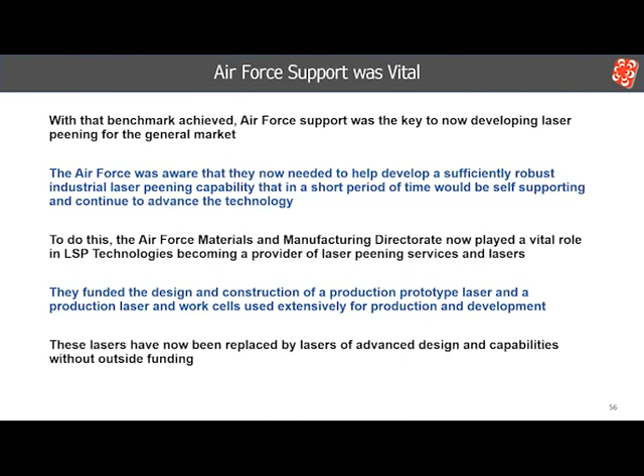With these Mantech-funded lasers, in 2003, LSP Technologies began production laser peening the blades of an integrally bladed rotor for the F-119 engine built by Pratt & Whitney. The F-119 engine powers the F-22 fighter aircraft.

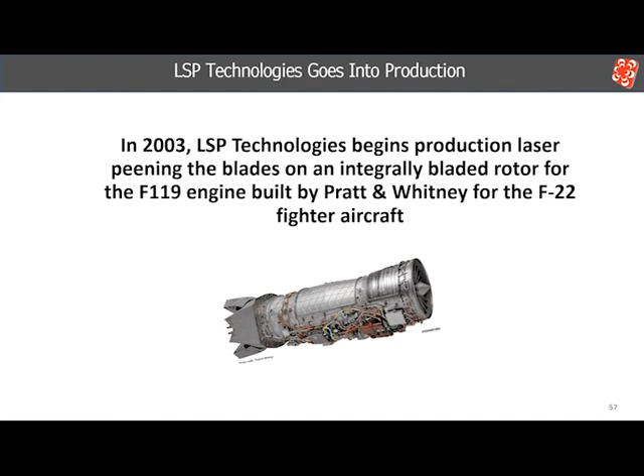In the late 1990s, Dr. Yuji Sano introduced the use of low-energy lasers for laser peening welds in nuclear reactor vessels. Applying laser pulses of about 100 to 200 millijoules onto spots less than 1 millimeter diameter at a high pulse rate, he attained compressive stress depths of up to 1 millimeter by applying thousands of spots per centimeter squared in multiple layers.

Features of the laser peening without coating, or LPWC process, are that it does not use an opaque overlay. It can be used underwater at a large standoff distance by halving the neodymium glass wavelength to 532 nanometers. It can be modified to deliver the beam through an optical fiber and is relatively portable.

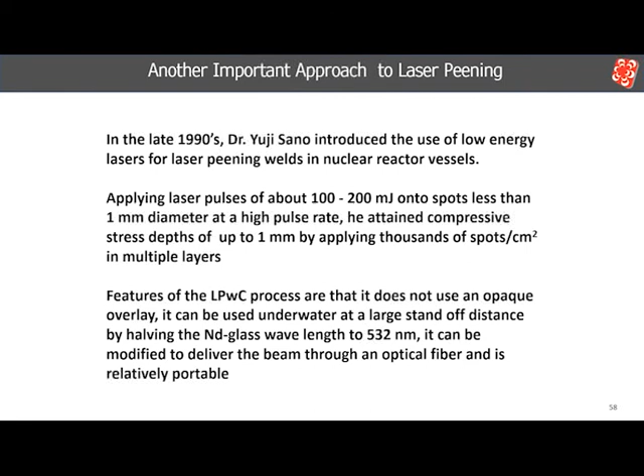The last 20 years have seen much increased activity in laser peening around the world. Shown here is a list of countries that either have or have had laser peening programs. They are listed in the order of the year of their first publication. There are 25 countries listed.

I may have a few wrong, but it demonstrates the widespread interest and the increase in the rate of laser peening knowledge now being generated worldwide. A total of over 1,000 technical papers have been published on laser shock processing. By far the most address laser peening.

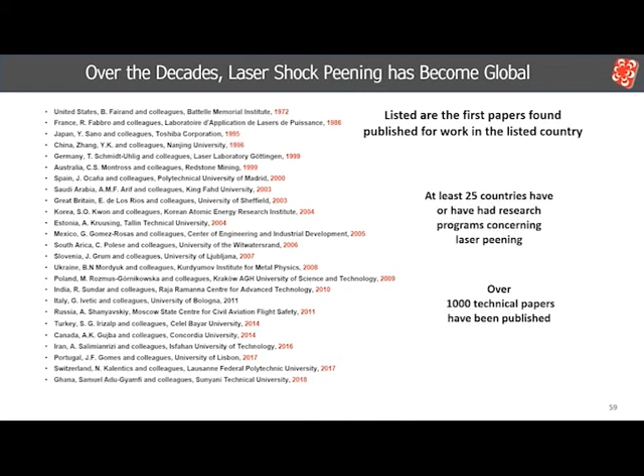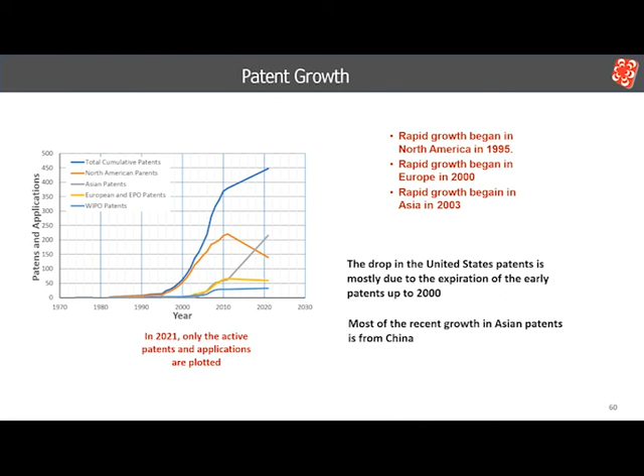The eventual success of laser peening as an industrial process was not only dependent on the unexpected turn of events and coincidental timing of other events, but equally dependent on the many dedicated contributors to the success of laser peening. There are too many to list everyone, but I will name a few.

Barry Fairand, John Koucky, Jeff Dulaney, Robert Reynick of the National Science Foundation, laser peening's champions in the Air Force Wright Laboratories, Bill Cowie, David See, Otha Davenport, Chris Lykins, laser peening's champions in GE aircraft engines, Todd Rockstroh, Manny Mannava, the French contributors, Rémy Fabbro, Patrice Peyre, Laurent Berthe, then Yuji Sano, Jose Ocaña, and many others.

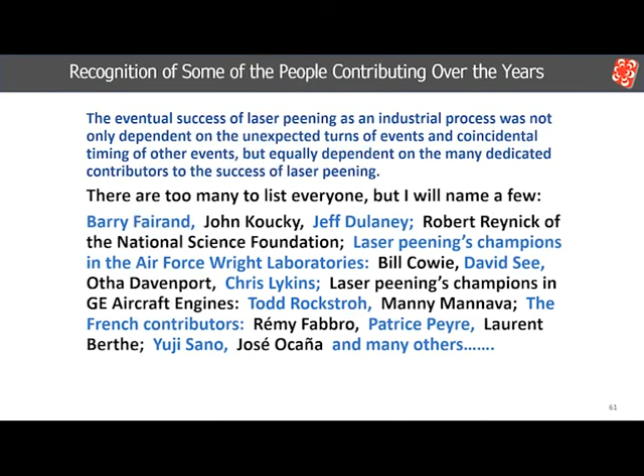Almost 50 years have passed since Barry Fairand asked Ben Wilcox whether a laser-induced shock might have some useful effect on metals. Little could they have envisioned the impact that conversation would have in the future. They took that first step on the path to an entirely new technology for making metal surfaces much more resistant to fatigue failure than existing technologies.

It has been a privilege to have traveled on this path along with the many others who have made critical contributions to the definition and growth of laser shock peening. To all of you who are taking this path forward, the future is in good hands.